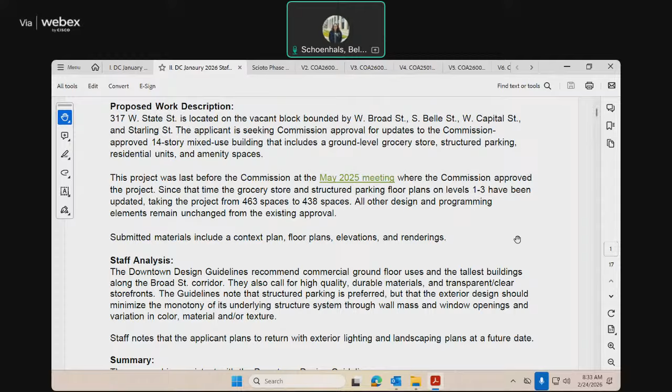All other design and programming elements remain unchanged from the existing approval, and submitted materials include a context plan, floor plans, elevations, and renderings. The downtown design guidelines recommend commercial ground floor uses and the tallest buildings along the Broad Street corridor. They also call for high-quality durable materials and transparent clear storefronts. The guidelines note that structured parking is preferred, but that the exterior design should minimize the monotony of its underlying structure system through wall mass and window openings and variation in color, material, and or texture.

Staff notes that the applicant plans to return with exterior lighting and landscaping plans at a future date, and the proposal is consistent. Just to quickly look at the drawings, like I said, they remain largely unchanged. It's just looking at those floor plans from levels 1 through 3. So this is level 1. You can see the grocery got a little bit smaller, and then the parking was expanded over. That's to accommodate also for changes on 2 and 3. But I'll let the applicant go through the package with you all.

Thank you. Very good. Good morning. Good morning. Could you introduce yourself for the record, please? Yes, Daniel Haynes with the Columbus Architectural Studio.

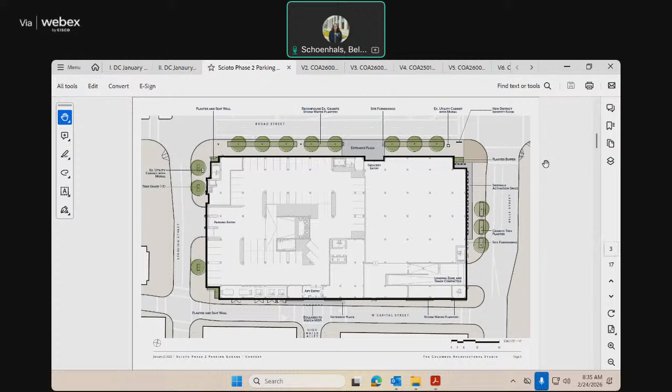Okay, what does it do to us on the outside of the building, I guess? Basically, there's one level of parking that's now gone from the elevation. Beyond that, there should be very little difference in appearance. The aesthetic should remain the same. So there was a middle level of that parking deck that's now disappeared. On the left there?

Yeah, it would go all the way through. We've actually improved the entrance sequence. The ramp used to be towards the corner of Capital and Starling, but we've moved that mid-block, and the city's traffic department was happy with that when we looked at it earlier. So we've improved that as well.

Any questions here for the applicant? Any comments? I have one.

So the original plan, because the grocery store had more frontage on Broad Street, there was more transparency, and now there's more screening and more garage over there. So I'm just wondering if you have any ideas or strategies for how to enliven that screening, whether creating an interesting pattern or making that something engaging for that streetscape on Broad Street.

When we came to this originally, one of our pieces was we had talked about art on the project. That's not part of this, but I think that's something we'd be looking forward to once we move into construction and figure out that last bucket of pieces. So we do think there's going to be some sort of art on the project, but it's not part of this initial piece.

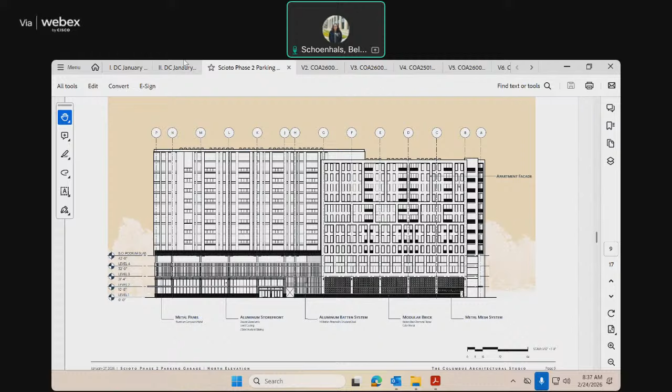All right, I wanted to note that Ms. Bartley is here, joining our quorum, and Mr. Pongonis has returned to the table.

This next case is for 410 South High Street, located at the block bounded by East Mound Street to the north, South High Street to the west, East Fulton Street to the south, and the Franklin County Parking Garage to the east.

This site currently holds the former Dorrian Commons Park, which opened in 1976, and a municipal building built in 1955. The applicant is seeking commission approval to demolish both the former park site and the James A. Karnes Municipal Building and construct a new 8-story City of Columbus Municipal Court building.

Included in the design is a pedestrian bridge over South High Street to connect the court building directly to city attorney offices within the 375 South High Street building. The applicant will salvage historical items on the site and will replace the mature trees on the site. Proposed materials include aluminum curtain walls, metal panels, and precast concrete panels.

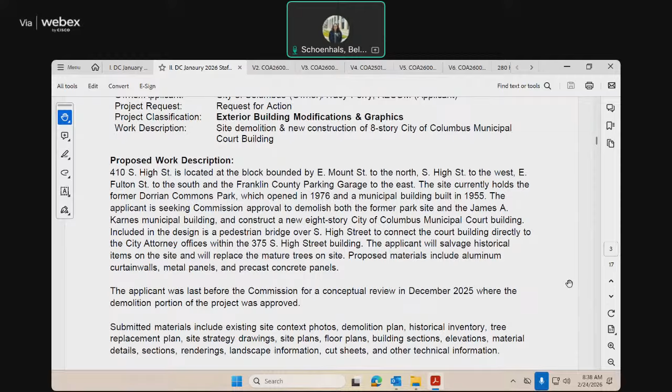The applicant was last before the commission for a conceptual review in December 2025, where the demolition portion of the project was approved. Submitted materials include existing context photos, demolition plan, historical inventory, tree replacement plan, site strategy drawings, site plans, floor plans, building sections, elevations, material details, sections, renderings, landscape information, cut sheets, and other technical information.

I'll have the applicant go over the packet with you guys, but I think the key here will be looking at that pedestrian bridge. That was the main focus of comments, and looking at the design changes within that. I'll have the applicant go over that.

Okay, just review very quickly. What are we actually asking for today? So the request is demolition today. That portion is already approved. So now we're approving the new construction and site work of the new building. Okay, so that's what they're seeking approval for today.

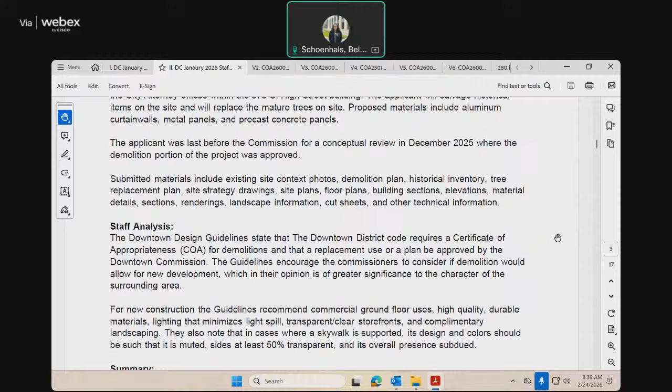Very good. Good morning. I'm going to go forward with my staff analysis. Please do, for the record.

The downtown design guidelines state that the downtown district code requires a certificate of appropriateness for demolitions and that a replacement use or plan be approved by the downtown commission. The guidelines encourage commissioners to consider if demolition would allow for new development which, in their opinion, is of greater significance to the character of the surrounding area. For new construction, the guidelines recommend commercial ground floor uses, high-quality durable materials, lighting that minimizes light spill, transparent clear storefronts, and complementary landscaping.

They also note that in cases where a skywalk is supported, its design and color should be such that it is muted, sides at least 50% transparent, and its overall presence subdued. The application is generally consistent with the downtown design guidelines, and staff notes that the Department of Public Service maintains authority over access to the right-of-way, just for that skywalk as it will cross over the right-of-way.

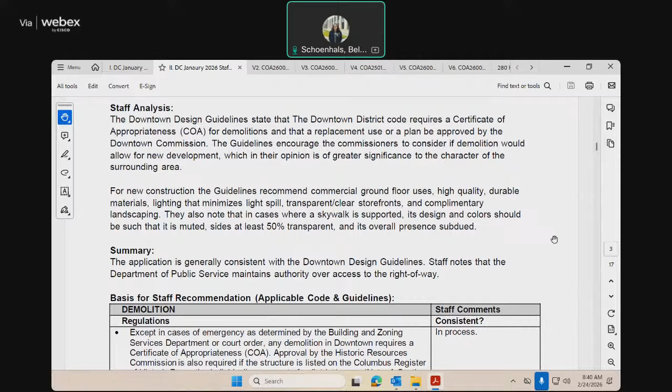Thank you. Very good. Thank you. Could you identify yourselves for the record, please? Yeah, feel free to pull that up. Is that better? Repeat it there. Great. Mark Parrish, architect with AECOM.

Chris Laster, landscape architect with Edge.

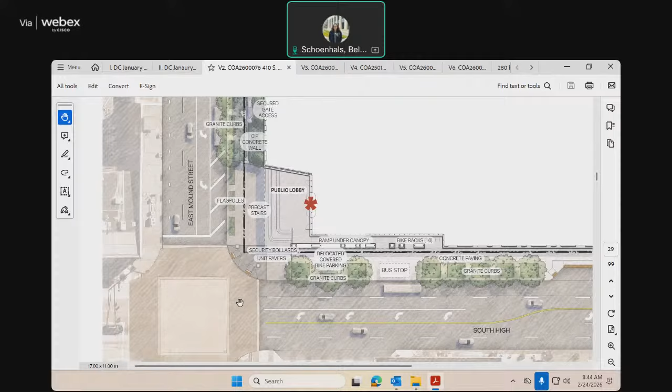Show us where that is, if you would. If you go to the next couple images it might help. That would be the north end of the site, on the left edge of that planter adjacent to the building, the north end of the building. Maybe one more, and then there's a couple vignettes in the next couple images that might help clarify that. Yeah, there you go.

In this area, though the shadows are kind of misleading, this is in full shade. We're treating that whole wall right there. There's an existing electrical vault right next to it, so we know we have to be very sensitive—we're not replacing or removing that. We're going to keep the cast in place wall away from it, set back maybe two feet. But yes, rubbed finish, and the planting in there will respond to the full shade conditions that are there.

You maybe go back one image from there. Yep, the northeast half of that right of way is an egress condition from the lower level of the building, so there's what amounts to a well there. What we've done is extended that cast wall to get pedestrian consistency at the right of way, and then where we can, picked up that planter bed that Chris just referenced on the west half of the site. We do have a secure gate to keep that secure for the facility going down to that lower level.

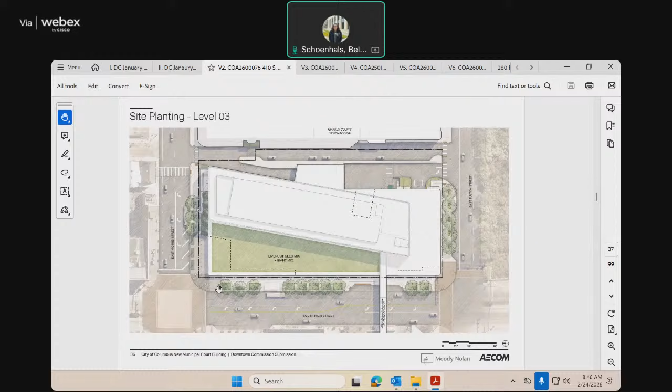I have asked this before, but to make the main entrance accessible, if I cross the street, do I have to go all the way down to the bus stop to find a ramp? Is that correct? Good question. If you could go back to maybe one more image.

That's perfect, good question. So the ramp starts about 60 feet south of the intersection there. Part of that is just the reality of the grades of the site. The site actually falls away to the east, so you really don't make up any vertical elevation by placing the ramp to the east or north end of the site.

So what we did was place the ramp in the condition where it could essentially get you to that upper level as quickly as possible. Since we saw this in concept, and even through the last review, working with DOT and working with the utilities out there, the grade differential between the sidewalk and that level has shrunk dramatically, almost a foot. So that ramp length has shrunk along with it, and the leading edge of the ramp has slowly migrated north to help close that distance.

When you're walking on that street and looking for the ramp, is there anything in terms of a landscape clue or an architectural clue that would help somebody understand this is how I would enter the ramp, this is where the ramp occurs on that street?

Yeah, good question. The four bays where you see the colonnade, where it says both bike ramps and ramp under canopy, where those building piers that support the canopy come down, the ramp is the first and only place on the project where it actually opens up. So all of that lands on a consistent base as you move south along that high street elevation. At the point where the ramp starts, we've opened it up effectively three bays early to give a visual and spatial cue that there's an opportunity to start to move into the glazed entry volume beyond.

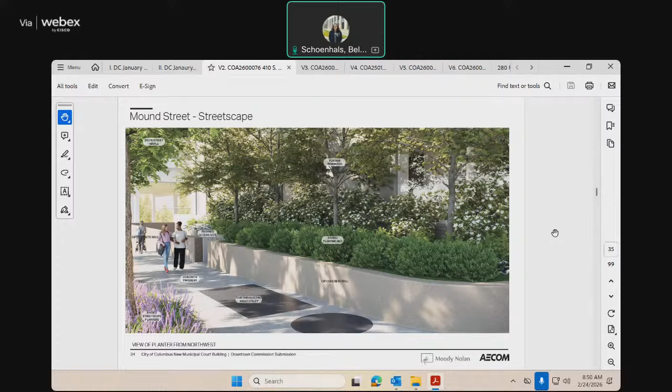At some point I want to look at... sorry to interrupt, Steve, could you just talk a little bit about the concrete wall? I recognize there are a handful of concrete walls, what is it, northwest, on the northwest corner here. But this is a lot of concrete wall without a lot of articulation, and it looks like it's getting a little tall. I kind of feel like that's a condition we're trying to get away from in the old buildings.

I can imagine all the reasons why it's concrete, and all the reasons why it's the height it is. Is there anything we can do to mitigate the appearance or height of that stuff?

Have you guys thought about it and this is what it is? Yeah, I mean, we have the ability to bring it down if we'd like, at least this wall, the one in the back. Probably not, because we will need at least a 42-inch high secured gate, if not higher, depending.

When you say the one in the back, what do you mean? You need a guardrail condition back there because the ramp slopes down, and eventually it becomes a fall condition, so it has to maintain a specific height.

Thinking too about this wall, we've tried to maintain a height that's not easily accessible, trying to prevent the public from getting up into that vegetative garden, walking, and then falling into the well. So we want to keep a certain height for that condition.

Excuse me, where is this wall? What stretch of roadway? Can I stand up? Yeah, if you go back to that vignette, I can show you.

Go maybe three down. Okay, yeah, that would be a good one. Go one more. This one. So this is that wall that we're talking about right here. This is the second wall.

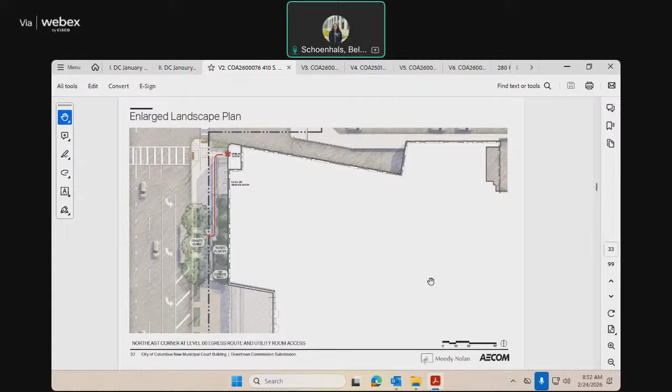But if we were to lower it, we would want to implement some sort of guardrail right here so that the public doesn't jump there.

Yeah, I totally get the guardrail condition and the fall height condition and the security of the building. I just want to be thoughtful about more expanse of plain concrete wall in this district, especially when the building is so nice.

Yeah, one of the other challenges too is this is our primary, essentially crash barrier for the security of the facility as well. So there are considerations that go into the height of that, which is, as you know, always a challenge.

And then there is this balance too, in terms of that height, where across the street the scale of those walls are purposely, I think, in many instances designed to be benches and occupied by the public. And part of that is there's quite a bit more distance to the building face, so again, a security conversation.

One of the challenges here is trying to create a kind of human scaled and tiered and layered section to that right of way, while also not necessarily promoting a ton of loitering because it's right at the building edge and there are security concerns that go with it. So you don't want people to sit on it, is where you're going. It's one of those balancing acts, you know. It's honestly an urban design challenge.

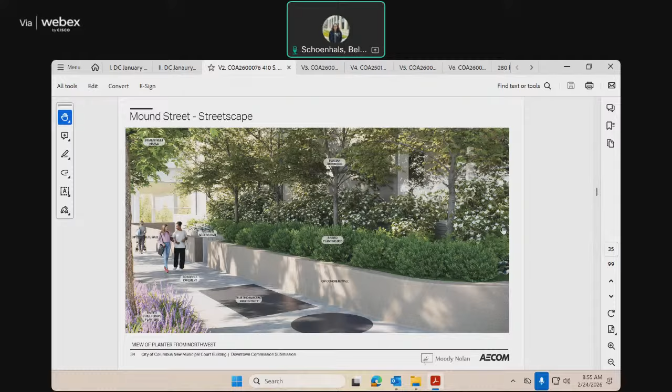We could do that. I think the concern there would be the more visibly porous that east half is, the more invitation it's potentially giving people to actually try to get down into that well. So again, it's kind of a balance between wanting to consider the pedestrian and define an edge there, while also not drawing a ton of attention to it.

I think with the grade change there, and the fact that you're probably walking down to go to the parking garage or something, it doesn't bother me, as long as it's not too high up near the entrance. That's where I am on it. I think it's okay too.

We maintain a datum, so it's the same height the whole time. So as you go up, it's disappearing. It never goes away, but it goes away at the entry.

And the last point on the material - when we were here last, we did have it precast to match the base of the building itself, more of an extension of the plinth that the building sits on. We did adjust that, in large part, to provide more continuity with the adjacent parcels across the street, and to promote more visual consistency with the three courts projects at Judicial Square.

Okay, are we ready to move on to talk about the elevations then, and particularly the crosswalk bridge? Everybody set on that? I don't want to push anybody along, we can always come back as well. Why don't we talk about this a little bit then?

So the bridge - if you remember, last time we were here we had a glass bridge with a heavy metal fin articulation. I think there was some appreciation for the color and texture that was providing, but there was some real concern about the visual weight of that, and just the reality that we weren't able to see through it, and it maybe didn't feel as contiguous with the building itself as it could be.

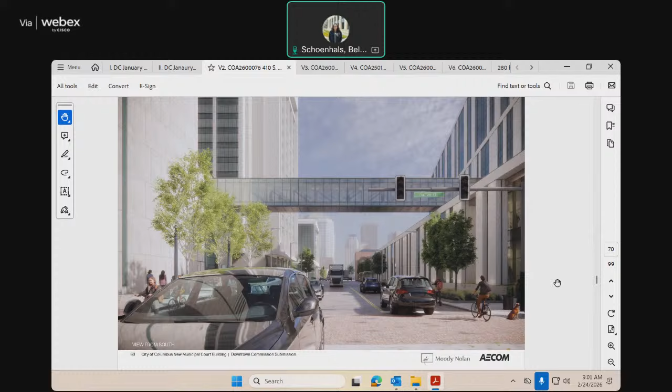We kind of discourage these overhead walkways, so I'm acknowledging that this one was necessary and we want it, but it seems to me this design kind of goes away—and I mean that in a good way. It's not drawing attention to itself. I think, if anything, it's creating a room surrounded by these new buildings and the old buildings.

And I think keeping it simple and elegant is the right direction. That's where I am on that too. I think you don't necessarily want it to be a design element, but I do think it should be very well done and very elegant, and I think you've gotten that here. I like this much better than what was there before.

Is this on a diagonal, by the way, or is it perpendicular to the street? It's perpendicular to the street.

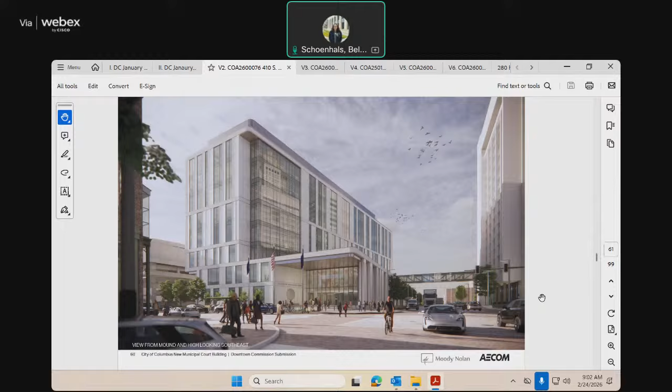The tower itself, if you remember, is rotated 10 degrees, so you do get a juxtaposition there. But the podium—those first two floors off of High Street—hold the street edge there. So the podium and the bridge itself are fully rectilinear, at 90 degrees.

So we have a proposal here to approve what we have seen, the design. We've talked through some of the site issues, particularly the entry and the streetscapes, and we've talked through the bridge. So I'm gonna try to move us toward getting a motion to approve this. I'm happy to, before we do that, see if there are any other questions or comments.

Anybody? And if there's anything from the audience—I see a few architects out there, so this is your chance. What's everybody's thought on this?

Have we already approved the demolition? Yes, we did. How did you guys arrive at your street tree selection? We worked with the urban forester and they selected the street trees. Are those consistent with what's around the corners there, west and north? Not necessarily, but we were trying to initially match that.

And then we went in for our public tree plan, and the only comments they had were about the tree selections that are up there. What selections are those? Along Mound, we have the State Street maples. On High, we have Musashino Zelkovas, and Fulton is done by the ODOT project—those are frontier elms.

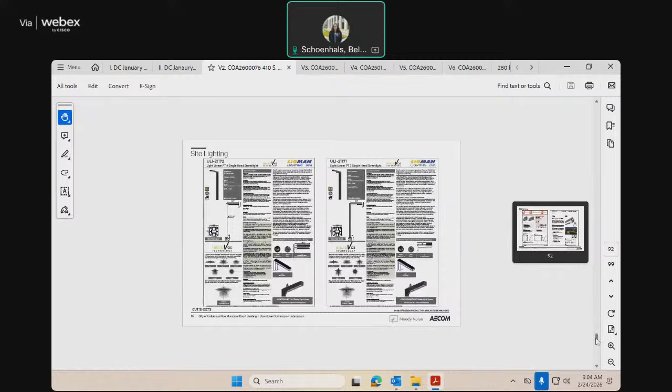Is that right? Yeah, yeah. So replaced by the elms. That's not a picture of a plane tree.

Picture of honey locust. Yeah, that one just stayed in there. That needs to come out.

It is the State Street tree, the Musashino Zelkova, as well as the frontier elm. Is that a standard variety of the Zelkova? Because those can get kind of very broad. This one is a lot smaller, a slightly different spread, maybe fifty, a slightly different variety, and is it more upright then? Oh, that would be good, especially for the buses and stuff. And then the ironwood is within our property, not the right of way.

In the bed, that doesn't seem the right size there. Okay, other questions, comments?

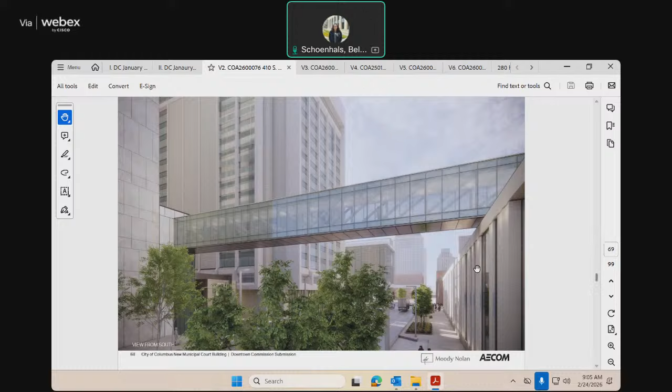The green roof that you have, how are you using that? Is that accessible to the tenants? Is that just there for sustainability? Good question. So we are still trying to make it accessible. Part of that's a budget challenge, part of that's a security challenge. The roof itself, I mean, you could say it's sustainability, that's really what we're implementing on the project.

It is our primary source for treating the water coming off the building and being discharged, because we have effectively no footprint on our site outside of the building footprint itself. That's the means for us to treat the rainwater before we discharge it. Did I get that right? Yeah, it's an Ohio EPA requirement for water quality on the project.

We have to. But it won't be on the top of the building, right? So it's about 17,000 square feet, all on that lower podium level. So all of the buildings around it will be able to broadly see it, but not the highest tower across the street. And we've essentially made it everything north of the bridge itself right now, trying to squeeze a little terrace in there and make that occupiable.

But as of right now, it is not. We're also working with some vendors around town to try to get as much scale within that planting as possible. So that is not part of their request here today for this package.

Okay, where are we here? Signage, are you using that? We'll come back for that. Lighting, do we have lighting in? We'll come back for that as well. Okay, lighting and signage, we'll come back to those.

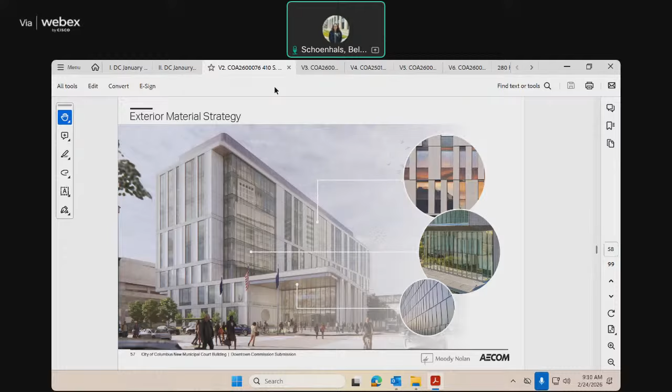Thank you. Thank you. Great, we very much appreciate your time. Nice building. Thank you for your tweaks along the way too here.

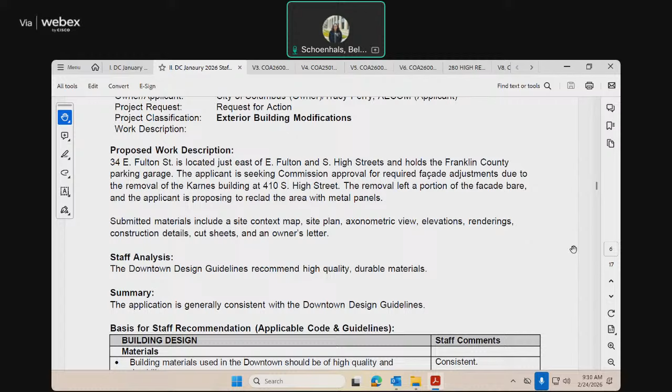This next case is for 34 East Fulton Street, essentially next door to the previous site. It's located just east of East Fulton Street and South High Street, and holds the Franklin County parking garage. The applicant is seeking commission approval for required facade adjustments due to the removal of the Karnes Building at 410 South High Street. The removal left a portion of the facade bare, and the applicant is proposing to reclad the area with metal panels. Submitted materials include a site context map, site plan, axonometric view, elevations, renderings, construction details, cut sheets, and an owner's letter. The downtown design guidelines recommend high-quality durable materials, and the application is generally consistent with those guidelines.

And I'll let the applicant move through their package. Thank you. Very good. Good morning. Could you introduce yourselves for the record, please? Yes, Lou Pellet, Moody Nolan, project architect. Tony Kosick, Moody Nolan, project architect.

Could you raise your right hands? Do you swear and affirm that the testimony you're about to give is the truth, the whole truth, and nothing but the truth? If so, say I do. I do. Thank you very much. Okay, walk us through.

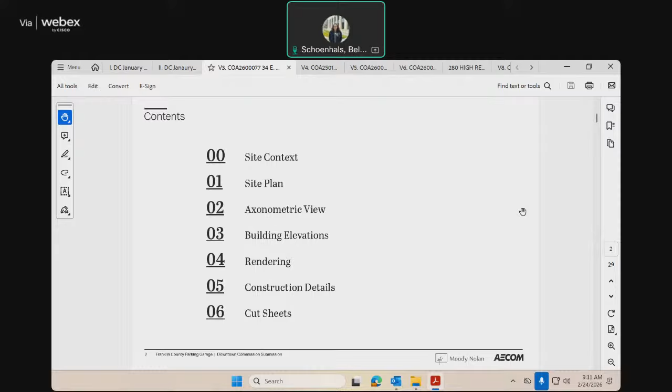The group has already approved the demolition of the Karnes Building. Part of that demolition included a large connector to the existing Franklin County parking garage, and that element was actually quite large - a 4-story connector. Happily, the connector had minimal connections into the parking garage. This was an elevated connector, basically a square attached to the middle of the parking garage. Those connections were only through the balconies into the parking garage, so we've got a big void at the side of the garage. If you're in the parking garage, what you see now is a CMU wall, so there are no actual penetrations at those locations.

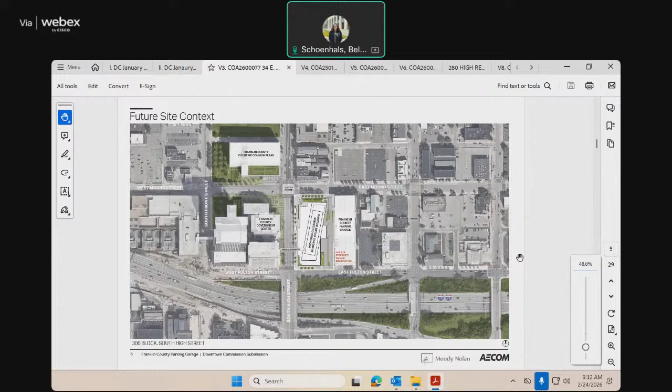Once we remove that connector, we will have a big box of exposed concrete on this large brutalist parking garage. What we're proposing now is to infill that void with materials complementary to our new building and also accent what's on the existing garage. I think the colors and materials will be complementary to what's occurring on the garage. Additionally, our new building will pretty much block the view of this existing parking garage, so we feel like what we've done is complementary. I'm not trying to downplay what's going on in the parking garage, but this will be pretty much in shadow of our new building.

We brought Tony to help describe what we've done with this infill, so I'll let Tony describe that. Okay, so just so we understand, what you've got here on the right, that's the subject of this application. The rest of the building, you're not touching, is that correct? Correct. Thank you, just for clarification.

Certainly. As Lou's saying, you can see with the paneling here, that's where the existing connector was, basically infilling. The two elements were structurally independent - they have their own separate structures, so taking it apart doesn't affect the garage at all. The glass box, if you will, is where the original connector was, how you got to and from the garage to the original Karnes building, which we're replacing in kind with curtain wall, basically leaving those elements there all the way up as they die into the panels. The panels are a tapered series metal panel, complementary to the rest of the garage, trying to add pop so it's not just bare concrete, but also adding some shadow and depth. You might see it slightly when you're coming in and exiting from the parking garage. Okay, and those are metal panels? Yes.

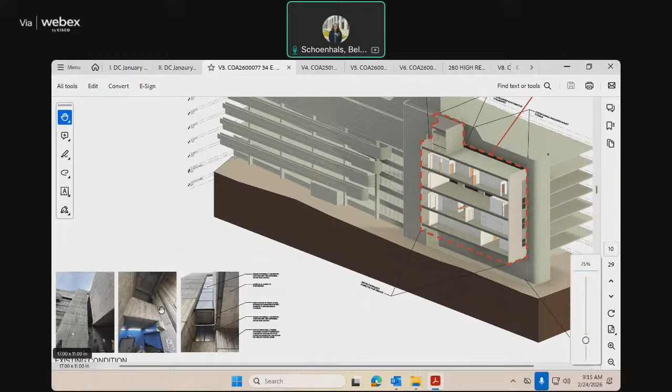So what is it - is it a metal wall on the inside too, metal panels? On the other side of the panel, inside the garage, it's just the existing concrete wall. That really doesn't change? No, correct, we're just covering it up so it's not bare concrete on the outside. On the inside it's remaining the same; on the outside we're covering it up so it's not exposed.

I have a question about the color of the panels. In your packet it looked like a color palette of grays, but it really has more of a warm tone. I'm wondering, because on the previous building the sample panels we looked at had some warmth to them - are you matching that? I'm not quite sure what the gray looks like. You didn't bring a sample with you, did you? No, we were planning on matching what we showed on the other building, so it would be the same color panel.

On the existing garage we have bronze glazed windows, so we're trying to play both sides - the existing garage and our new building - hitting a medium range between the two: introducing our panels on the building but also respecting the dark bronze and brown glazing on the existing garage.

So this is light, but it's a bronze tone rather than gray? Correct, that makes sense. The sample colors you're using are the gray ones in the packet? They're primarily the gray. And as mentioned, we're trying to introduce some shading and shadowing, which is why we've varied the panel dimensions - trying to mask as much as possible that it's not a direct match.

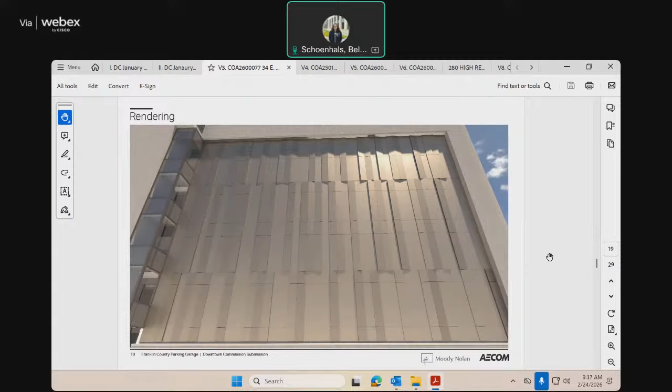What's the pleasure of the group? Move to approve. Is there a second? Second. Okay, there's a motion on the floor. Any questions, comments? Hearing none, all those in favor say aye. Aye. Those opposed? Motion carries. Great, thank you.

All right, so this next case is for 181 East Broad Street, located at the southeast corner of East Broad Street and South Fourth Street. The site contains a structure built in 1856, along with a surface parking lot, and is home to the Columbus Club. The applicant is seeking commission approval to add new parking lot hardscape, new segments of brick masonry wall with intermittent new fence sections along the east...

Oh yep, we're recusing ourselves. Okay, let me just let the sounds die down. I just wanted to note that Mr. Loversidge and Mr. Whitman are recusing themselves from the case. Jana, you're good with taking over to chair?

Okay, so this site contains a structure built in 1856 along with a surface parking lot and is home to the Columbus Club. The applicant is seeking commission approval to add new parking lot hardscape, new segments of a brick masonry wall with intermittent new fence sections along the east frontage, new gates in existing fence locations along the west and north frontages, new automatic vehicle gates at the southern parking lot entrances, modifications to the sidewalk paving along the northern Broad Street frontage, and new landscape plantings.

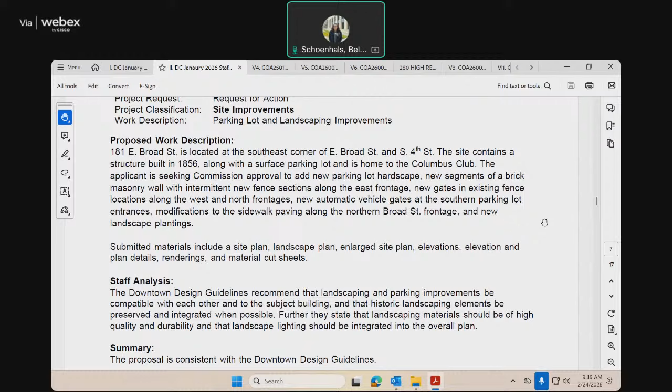Submitted materials include a site plan, landscape plan, enlarged site plan, elevations, elevation plan details, renderings, and material cut sheets. I'll let the applicant mostly go through their application, but again, it's mostly just along the borders of the site and then interior hardscape there.

The downtown design guidelines recommend that landscaping and parking improvements be compatible with each other and to the subject building, and that historic landscaping elements be preserved and integrated where possible. Further, they state that landscaping materials should be of high quality and durability, and that landscape lighting should be integrated into the overall plan, and this proposal is consistent with those guidelines.

Thank you. Okay, well, good morning. First, we'll swear you in. So raise your right hand. Do you swear and affirm the testimony you are about to give today is the truth, the whole truth, and nothing but the truth? So say you do. I do.

And if you could give your name and association for the record. Chris Meyers, Meyers and Associates Architects. Nick Munoz, Meyers and Associates Architects. Then you can walk us through the project.

Thank you for having us. The project really started as an evolution of some construction that had been happening to the east of the property. There was some damage and deterioration along the east edge of the property at the existing parking, some existing hedge row and plantings. There is currently a fence. And through that damage, it prompted the club to want to elevate the perimeter enclosure of the property to match some of the existing brick wall and fence enclosures that are around other portions of the site.

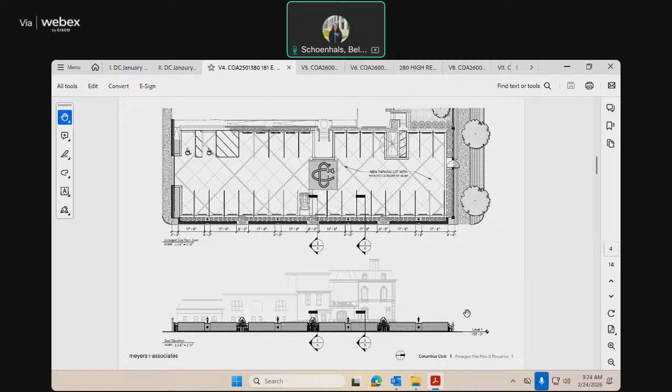Well, it looks very thoughtfully designed. Thank you. Yeah, I like how you broke up the wall with the fencing, where the trees drop in, where the hornbeams come in, and the wall's 6 foot tall. It's like 5'6", I think, with a cap detail. Again, it just matches the rest. Yeah, 5'6" with the stone cap.

That aligns with the existing walls on site. The metal work is new because of the new improvements, but it replicates the historic wrought iron railing. There's a craftsman that the club uses out of Lexington, Kentucky who's coming up to do this work.

Those details will be really beautiful. Great detail. Okay, well, does anybody have anything else? Okay, so does anybody like to give a motion for approval?

Could I clarify one thing? I think we might have originally submitted as a conceptual review, and I think it's now being considered as the final review, which is what the document says. We're happy to have it considered as the final review. We didn't want to leapfrog the process. Given the additional drawings that I requested that you all were able to provide, this went from conceptual to a complete application.

So we're voting for commission approval today. And I forgot to ask, is there anyone in the audience that has a question or comment on this project?

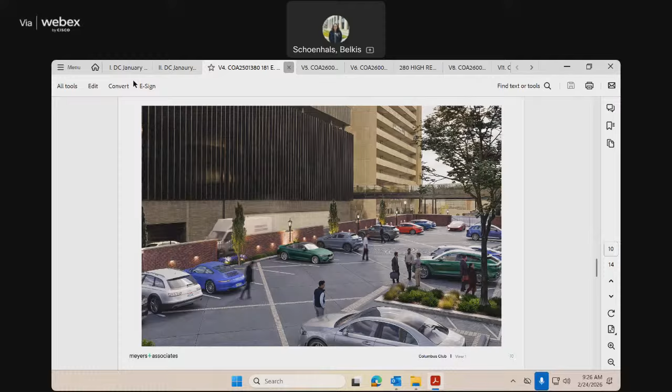I guess we should tell them. Oh yeah, that's great. We're just going to wait for other commissioners to return, two members to return.

And this is for 344 West Town Street. So if those applicants are here, they can go ahead and come up to the table and take a seat. Thank you.

This next application is for 344 West Town Street, a vacant lot located at the northwest corner of West Town Street and Bell Street. The applicant is seeking commission approval to construct 8 new pickleball courts with fencing and surrounding synthetic turf. The remainder of the site will be seeded with grass lawn. Submitted materials include a utility plan, site plan, and material cut sheets.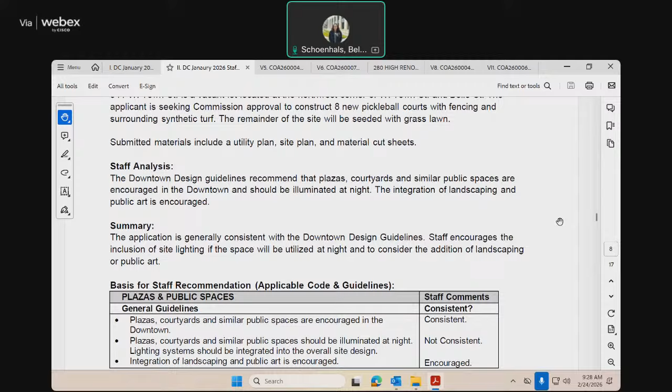Okay, very good. Would you introduce yourselves for the record please? I'm Robert Ferguson with EMH&T. And I'm Nick Stefanik with Downtown Columbus, Inc. Could you raise your right hands? Do you swear and affirm that the testimony you're about to give is the truth, the whole truth, and nothing but the truth? I do. Thank you very much.

The project entails the installation of 8 pickleball courts and surrounding ancillary improvements, including sidewalk that leads over to Belle Street as well as Chapel Street. Belle Street's to the east and Chapel Street to the north. The courts will be surrounded by chain link fence, vinyl coated black, with gates so that it can be secured at night when it's not in use.

Nick's going to talk a little bit about the operation and hours. Sure, this is certainly intended to be a daytime amenity for the residents around the area. We heard through the downtown strategic planning process that more residential amenities like this would be a real asset to downtown Columbus, and we agree. This is currently a gravel parking lot that is slated for future development, so this is intended to be a temporary installation, expecting around 3 years. With that being said, this is intended for daytime use.

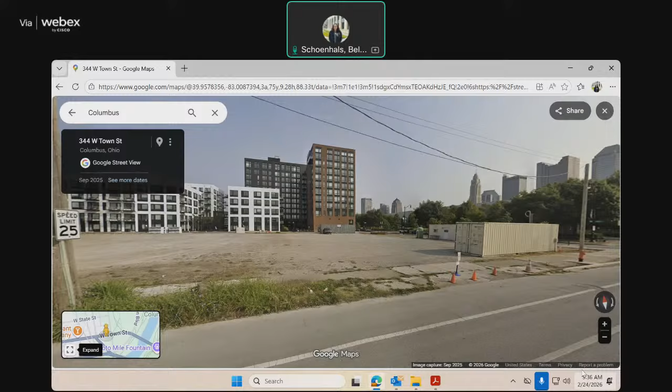I think shifting this creates an experience for 3 years, and I don't think it costs any more money to shift it than it does now. It creates an amenity you can be proud of—it looks good, feels right, and is complimentary to the park and to the residents. Yeah, I think we can slide that down, increase the space in the north end, and accommodate that request.

Is there any additional grading you would need to do in order to shift it? No, we would just have to modify the grading scheme slightly to accommodate that, but it wouldn't drastically alter the design as it sits today.

So we heard a couple comments about benches or shaded areas for spectators—are you planning that at all? I don't see it in this drawing. It would be movable furniture, umbrellas, things of that nature. How would that work—do you put them in and take them out? Yeah, it would be seasonal, installed seasonally. So they wouldn't be out there in the winter, but they would be out there during the summer.

What's the pleasure of the group here? Any comments from the audience? What's the pleasure of the group here on this? Do you want to make a motion with some thoughts attached to it?

Motion to approve shifting the courts to the south, where it straddles Belle and Town, with that 20-foot offset you mentioned before—that was your guiding light—allowing the north side to open up to be more of a pedestrian experience for furnishings of that nature.

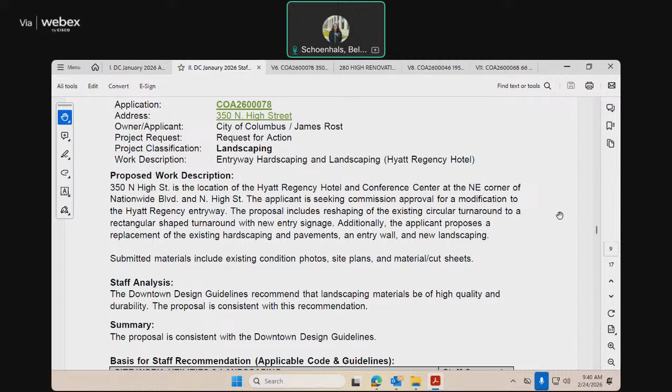350 North High Street is the location of the Hyatt Regency Hotel and Conference Center at the northeast corner of Nationwide Boulevard and North High Street. The applicant is seeking commission approval for a modification to the Hyatt Regency entryway. The proposal includes reshaping the existing circular turnaround to a rectangular shaped turnaround with new entry signage, and additionally the applicant proposes replacement of the existing hardscaping and pavements, an entry wall, and new landscaping. Submitted materials include existing condition photos, site plans, and material cut sheets.

This is the existing condition with that circular turnaround. And then if you look at the site plan, you can see it becomes more rectangular in nature. I'll let the applicant go through this in detail.

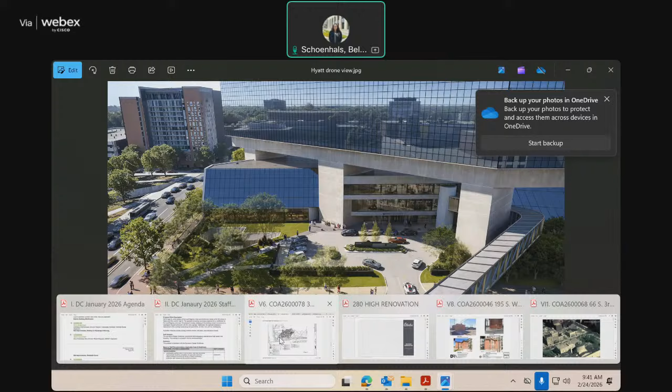We received some additional rendering photos that were not included in the writing of the staff report, but I wanted to give the applicant the courtesy of having those images pulled up here so we can see some of these renderings. Downtown design guidelines recommend that landscaping materials be of high quality and durability, and the proposal is consistent with the downtown design guidelines. Thank you.

Very good. Do you happen to have a picture of the existing condition over there? Yeah, I can pull it up. Why don't we take a peek at that while we pull this up.

All right, so we are in it here. This is that turnaround. So they're really just wanting to square this off, make it a softer treatment. I'll let the applicant speak to this, but the site work area is in this area and then connecting over onto High Street. But this is what we're working with currently.

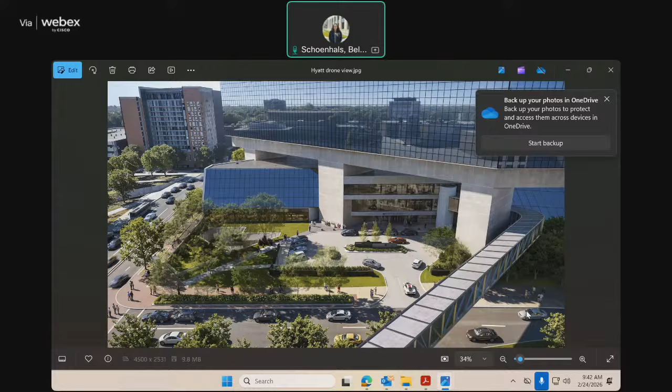You could even see when you asked to see the existing condition, that demonstrated sort of what we've got to fix here. That's what we have. We're really adding more capacity, a better situation for our guests in staging cars and having the valet function operate better, and have it look better. I think we can do that. It's an important corner at Nationwide and High, and we're just trying to make an improvement here.

Jeff can probably walk you through it. It is tired now, for sure. There's something to be said for just freshening things up. Yeah, we do it on our buildings, you have to do it. Sure, and I think you get something out of it, and it helps the environment, the community too as well. Do you want to walk us through it?

Yeah, Jeff, as Brian said, what you're doing is pretty simple improvements. We're really not adding that much more pavement, given the way the site lays out now, but we do add a little bit of pavement to square the auto court off. We've got a granite wall and some landscape along Nationwide that will help screen it a little bit. We're increasing that landscape island in terms of size, and that will have a sign component in the future, which when we have a need for graphics, we'll come back to you. Kind of a monument sign, low on the wall, nothing too tall, some landscape to go along with it.

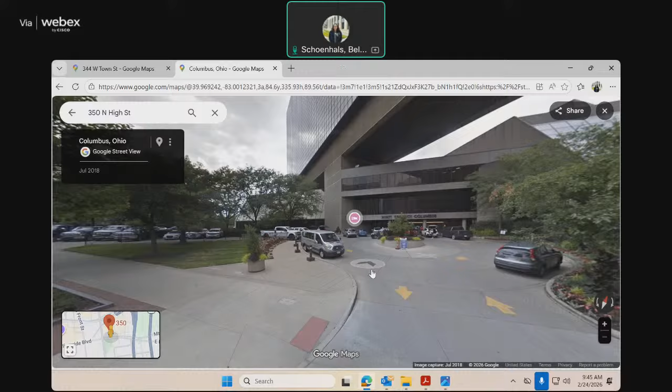We can handle that when it comes about. Any change in lighting or anything there? Not really, there's a couple leftovers from a lighting perspective, but generally just some uplights on the trees in the landscape island.

Tell us what you are doing as it relates to planting. There are 3 trees in there—those are ginkgo, which will have nice fall color, a nice high canopy as they grow in, and an upright form. We've also got some ground cover, pachysandra, and some spirea. Otherwise just some basic stuff like a taxus hedge along the granite wall.

Basic stuff, great. Questions, comments? Two quick questions—the low walls you're creating, that's clad in what material? Granite. And what color is that? Black. Nice and simple, not trying to make too much out of it.

And that's for the walls labeled A, B, and C, right? That's right. That particular granite is the same one used along 10 West Nationwide on the Front Street side. That wall material looks really good, that's right, along Front.

For the wall labeled A, is the landscape sitting behind that wall? Behind it, yeah. So I think it said those little trees are about 3 feet high, or maybe 3.5. Yep, that's right. So that will be a little bit higher than the wall? Generally, yeah—there's a bit of grade change to deal with, so we're trying to handle the appearance from the front with the grade change, and the appearance from the inside. Right, but it looks like from your rendering that when looking into the courtyard, you'll see the landscape above it to some extent. That's right.

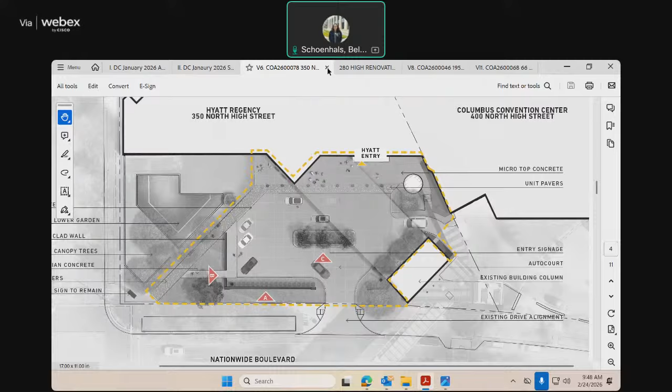This next application is for 280 North High Street, located at the northeast corner of North High and East Chestnut Streets, the site of an 18-story office building. The applicant is seeking commission approval for exterior building modifications, landscaping, and graphics to retrofit the building to a mix of office and residential uses. Levels 1, 2, and 12 through 14 will remain office, and the rest will be residential, including 1 to 2 bedroom apartments. The work includes adding exterior aluminum and glass balconies, new windows, new fencing, and a lower amenity courtyard. New graphics include an illuminated monument sign, a non-illuminated canopy sign, a non-illuminated wall sign, and 2 vinyl window signs. Looking at their package, I'll quickly go through it.

This is the building in question, located on North High Street. We have the building and then what will be a lower courtyard. This is the existing condition of the site, and this is the proposed site plan.

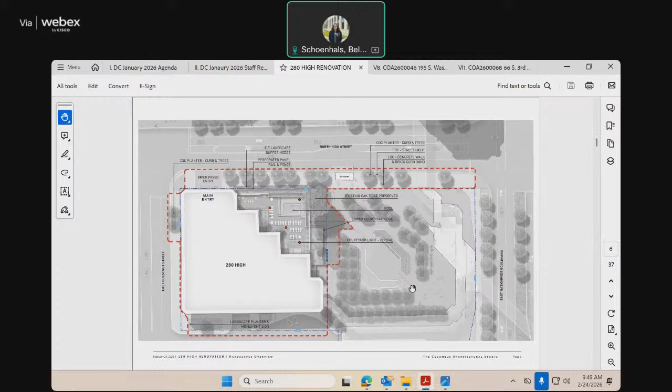Materials, some information about the proposed fencing, plantings, and then moving along we have floor plans, elevations, and materials. I'll let the applicant go through those, but I also wanted to mention some imagery was provided to me which was not included in the writing of the staff report, but I did want to display them on the screen as a courtesy.

So we have a few renderings here, and the applicant can talk through those.

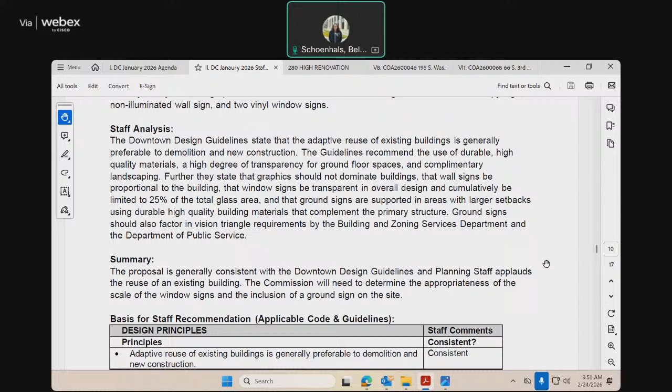In summary, the downtown design guidelines state that adaptive reuse of existing buildings is generally preferable to demolition and new construction. The guidelines recommend durable, high-quality materials, a high degree of transparency for ground floor spaces, and complementary landscaping. Further, graphics should not dominate buildings, wall signs should be proportional to the building, window signs should be transparent in overall design and cumulatively limited to 25% of the total glass area, and ground signs are supported in areas with larger setbacks using durable, high-quality materials that complement the primary structure. Ground signs should also factor in vision triangle requirements by the Building and Zoning Services Department and the Department of Public Service. The proposal is generally consistent with the downtown design guidelines, and planning staff applauds the reuse of an existing building. The commission will need to determine the appropriateness of the scale of the window signs and the inclusion of a ground sign on the site.

Thank you. Very good. Now, do I need to, do you want me to swear these folks in again?

They've already all been sworn in. Could you identify yourselves for this case? Dan Haynes, Columbus Architectural Studio. Ryan Ellis, Nationwide Realty Investors. Jeffrey Pongonis, MKSK. Thank you, and they have all been sworn in. Does that work for you, or do you want us to go through? No, they've all been sworn in, so that continues. I also wanted to note for the record that Mr. Pongonis has recused himself from this application and is serving as one of the applicants to present. Thank you, all right, very good.

Thank you. I'll kick it off and then turn it over to Jeff and Dan. As you know, this is a challenging project. It's capital intensive, but I think it gives another 45 years or longer life to this building because it's responsive to the market.

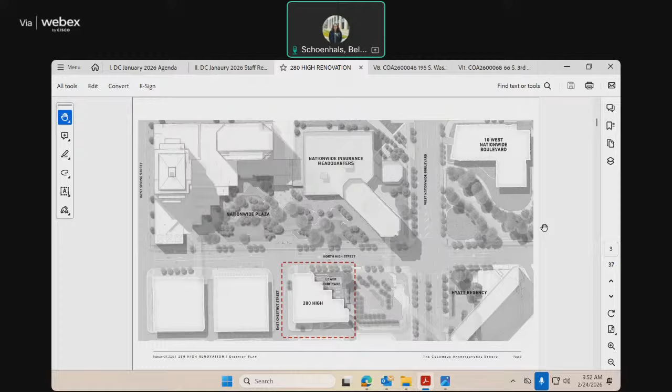We identified that this building, really designed in the late 70s and built in the very early 80s, had a floor plate that could be adapted to apartments, fairly consistent with how we've been developing. We've developed 2,000 apartments between the Arena District and Grandview Yard, so we know what the market wants to see. We felt like we could efficiently add 148 units to this building.

But the market's competitive and we can't leave anything out. We still need a strong amenity package. The questions we asked ourselves early on: how are we going to get outside space? We wouldn't build an apartment project in Columbus without balconies or patios, so that was challenge one. And then also, how can we add amenities? We also wouldn't build an apartment project without access to outside space, a pool area or something like that. In both cases we were able to figure that out—not inexpensive to do, but it makes sense for us, and Dan and Jeff will get into this, but we still have it feel appropriate in an urban area.

So we've got the balconies. We think they enhance and modernize the look of the building. We have a water area—I'll say a pool or a spa, a large spa or small pool. Still working on the details of that in some respects, but that's what we're going to have there.

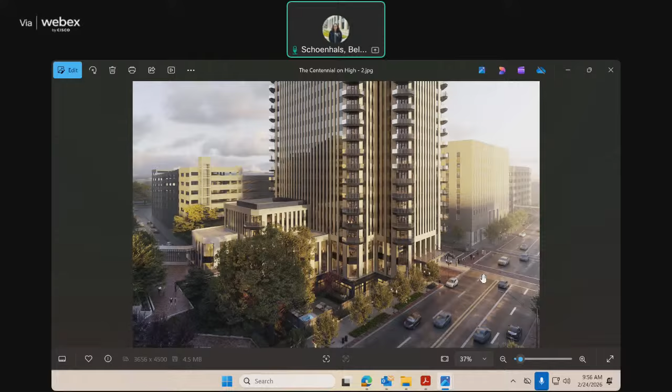Let me step back for a second. I mentioned this pool or spa area. We identified that the basement space extended beyond the footprint of the building, all the way out to High Street, which gave us an opportunity, and ultimately what's in our plan, to take the lid off the basement outside the footprint and expose a lower courtyard that's 15 feet below High Street grade. So now we have an opportunity to get that pool or spa amenity within the configuration of the project. It gave us the green light to build a project that's going to be attractive from a market standpoint.

So we're excited about it, and think we can get it all leased. As most of you know, Nationwide, who occupied the building for most of those 45 years, not all of it but most of it, has some surplus office space. The way we look at it, our apartments are leased and we want more of them, and we have plenty of good office space still available for anybody that wants to be part of the Arena District or the Nationwide area. So, good response, I think it's the appropriate response to the market, and it gives us a future for this building. With that, I'll turn it over to Dan and Jeff to get into the details.

I think it's for approval.

All right, good, so I'll set up the site a little bit and then pass it over to Dan, and if I miss a detail on the building, Dan, let me know. So just a couple basic site parameters here. The entry, you can see, is located at Chestnut and North High. That'll be a nice paved brick entry with a canopy over it. Not much of note on East Chestnut. Around back is just a little bit of landscape and circulation improvement there. There's also a small sign to help visitors understand access to leasing and access to the adjacent parking garage. Then back to the front of the project. Excuse me for a second.

From the architectural aspect, from the overall view—Belkis, I know we've got you jumping around—if we can look at the renderings real quick. If we step back and think of this whole area as the overall challenge: these buildings were built in 1980, and we wanted to respect what was happening in that campus, but still update it. The addition of these glass balconies really gives it an updated look, but still very respectful for what's in the area and the campus that's happening through there—sort of a glass facets to those pieces, I think is a nice add.

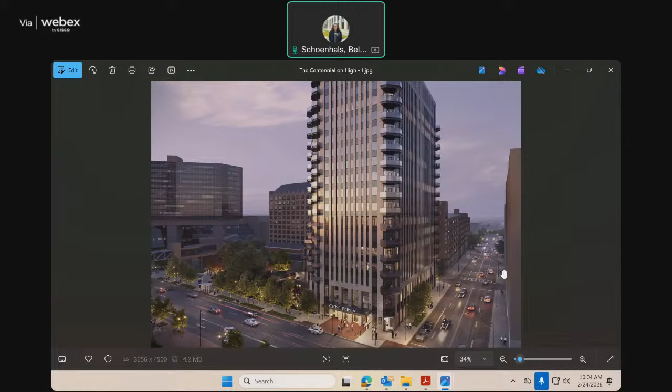That's going to be clear glass that we're adding, with a metal panel on the fascia of those balconies as well. We've also, as mentioned before, added more glazing up top where we're adding those penthouse units. You can kind of see up there that right now is just all precast—we've opened up some windows through there.

And then down below, as mentioned, below grade we're switching to a dark brick and dark cast stone details, which we think will really set off this lushly appointed planting that's happening down there. So here are those pieces—it'll have a look of the foundation being exposed.

We have a clubhouse down there and 5 units that walk out and have sort of a private zone happen in there. We went through a lot of expense and thought to preserve the existing oak on our property piece there. It's a wonderful tree and we're trying to keep that in existence. So that's the broad scope of what we're trying to do architecturally.

I think this is a good building for conversion because of the shape of it. So many of these buildings are square and deep, so you can't get good units because you can't get to the edge. The way this works out, the floor plan looks like it works really well, pretty efficient.

So the office floors are sort of in the middle of this. That sounds like a nightmare, adds to the challenge. But it also is responsive to where we had these existing tenants.

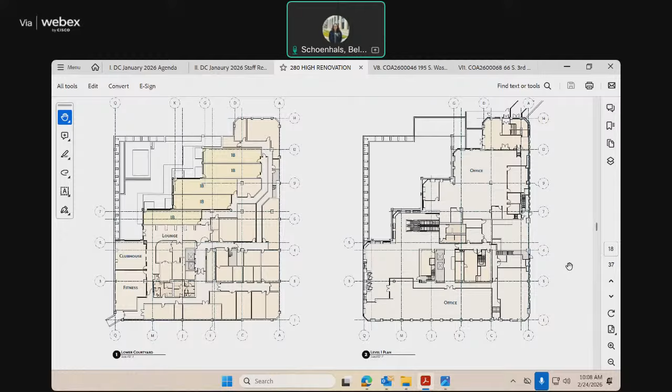My question is, can you go over the glazing, like in the packet? You mentioned that you're replacing windows and replacing spandrel glass - can you go over the extent of that and the color of that? Where those balconies are, where we're opening those pieces up, we're removing that curtain wall system and replacing them. For all of the stuff that we are replacing, we're putting like with like, so that we've got the same consistency of the glazing happening through there. There are larger sections along the way where we are keeping the existing glazing in place. We are going through and looking at ways of making sure that we've got the thermal protections that we need - we're doing insulation to the walls and stuff for that.

We're putting the clear glass down on the balconies themselves. Where we've opened up some areas that span multiple levels, that's where we'll have some of that spandrel material put back in place, sort of like with like, if that makes sense.

Is every window on the project being replaced, or matched to existing? Everything is being matched to what's existing there. Our color palettes are working off of that too, because we want to be respectful to our neighbors and part of that campus piece. So our metal colors are matching, and our glazing is matching as well.

What was the original glazing color, is that pretty much clear or heavily tinted? It's sort of a bronze color. Back in 1980, this is how they got thermal protection back in the day, they had to go darker, so we're going with that darker glazing. Will you feel there's enough transparency from inside an apartment? I don't think from the inside out you're going to notice it, it's not noticeable. We've experienced that in other condominium projects we did in the early aughts where those were dark glazing too. I don't think it's noticeable inside.

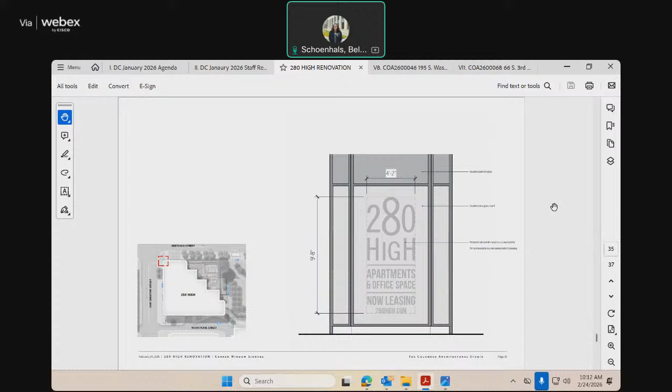So we're coming up on our 100th anniversary, and this is a nod towards that, almost a thank you from a community standpoint for all the support over 100 years. We wanted to incorporate that and go beyond 280 High. We'll have to come back and do signage, there's been some nods and references to certain signage pieces here, but we've got more work to do on that, and we're changing the name.

Anything on the lighting then that happens? I think we're not changing any of the lighting we have in this package here. We are adding some new lighting at balconies, and we've also added small lighting around the pedestrian areas. So we'd be approving what you have in the package, and the same thing for the lower courtyard as well.

Any other questions for anybody? I just had one quick question about the lower courtyard. I understand that's recessed from High Street. Within that, I see curbs around the landscaping, not curb cuts. Are those all at the same level or are there grade changes? It's a tiered terracing system. So we're approximately 15 feet below grade.

What we're using is we're trying to get as much landscaping and lushness down there as possible, so we're using terrace steps to get greenery to fall down on top of that. So what we're seeing here, the curbs, are terrace steps? Correct, those are the terrace steps.

Okay, other questions? What's the pleasure of the group then, folks? I move approval. There's a motion to approve, is there a second please? Okay, there's a second, the motion is on the floor. Any other questions, anything from the audience? Hearing none, all those in favor say aye. Aye. Those opposed? Motion carries.

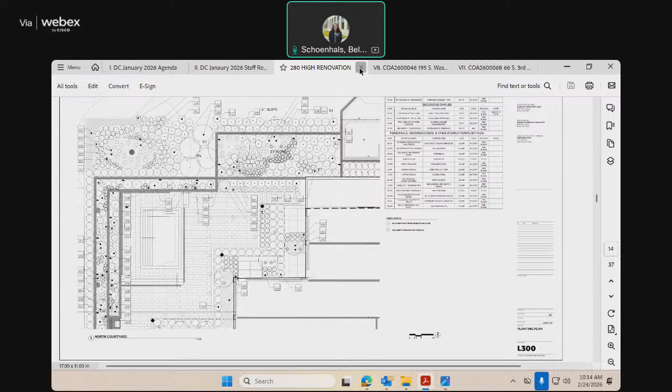I know, those are exciting, huh?

Keeping that. All right, so this next application is for 195 South Washington Avenue. This site is located at the southwest corner of South Washington Avenue and East Walnut Street, and holds a vacant residential structure built in 1900.

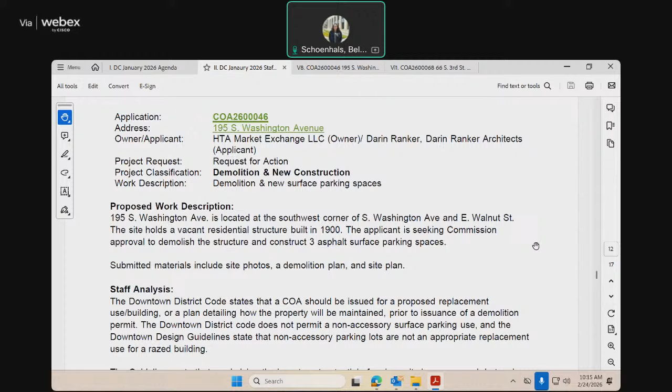The applicant is seeking commission approval to demolish the structure and construct 3 asphalt surface parking spaces. Submitted materials include site photos, a demolition plan, and a site plan. We have a few existing site condition photos here, and I also have the Google Street View pulled up, if we want to look at that. And then just a site plan of what's there currently, noting the existing structure here at the corner. This is the proposed site plan, noting the demolition of that structure and then the added parking spaces.

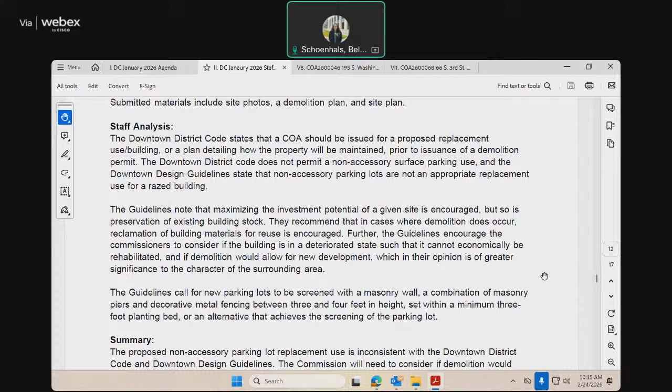After review, the Downtown District Code states that a COA should be issued for a proposed replacement use or building, or a plan detailing how the property will be maintained prior to issuance of a demolition permit. The Downtown District Code does not permit a non-accessory surface parking use, and the Downtown Design Guidelines state that non-accessory parking lots are not an appropriate replacement use for a razed building.

The guidelines note that maximizing the investment potential of a given site is encouraged, but so is preservation of existing building stock. They recommend that in cases where demolition does occur, reclamation of building materials for reuse is encouraged. Further, the guidelines encourage the commissioners to consider if the building is in a deteriorated state such that it cannot economically be rehabilitated, and if demolition would allow for new development which, in their opinion, is of greater significance to the character of the surrounding area.

The guidelines call for new parking lots to be screened with a masonry wall, a combination of masonry piers and decorative metal fencing between 3 and 4 feet in height, set within a minimum 3-foot planting bed, or an alternative that achieves the screening of the parking lot.

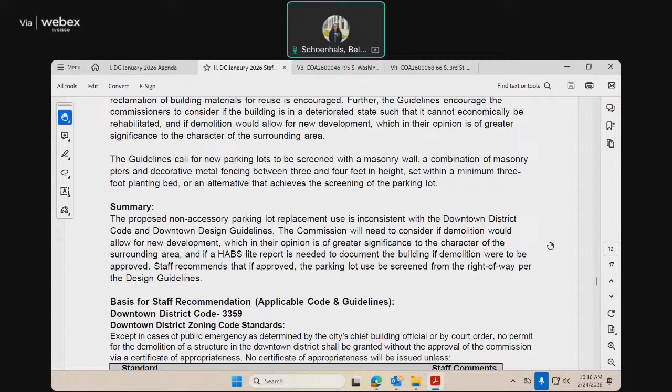The proposed non-accessory parking lot replacement use is inconsistent with the Downtown District Code and Downtown Design Guidelines. The commission will need to consider if the demolition would allow for new development which, in their opinion, is of greater significance to the character of the surrounding area, and if a HABS lite report is needed to document the building if demolition were to be approved. Staff recommends that if approved, the parking lot use be screened from the right-of-way per the design guidelines.

Thank you. All right, could you identify yourselves for the record, please? Yes, my name's Mike Preiser, I'm with the Track Group. I'm the general contractor representing the client, or the tenant for the space. The owner. Yeah, the owner. Beth Reel with Darin Ranker Architects.

Could you raise your right hands? Do you swear and affirm that the testimony you're about to give is the truth, the whole truth, and nothing but the truth? If so, say I do. I do. Okay, thank you very much.

Go ahead. Obviously, in light of the comments from the Downtown Area Commission, we've spoken to the owner, and they would love to still demolish the building but replace it with green space in lieu of a parking lot. The existing structure is in much-needed disrepair. I wasn't able to access interior pictures of the building at the time of submittal. I did print some here, and I'm more than happy to share those with the group. That's okay if you'd like to pass that around.

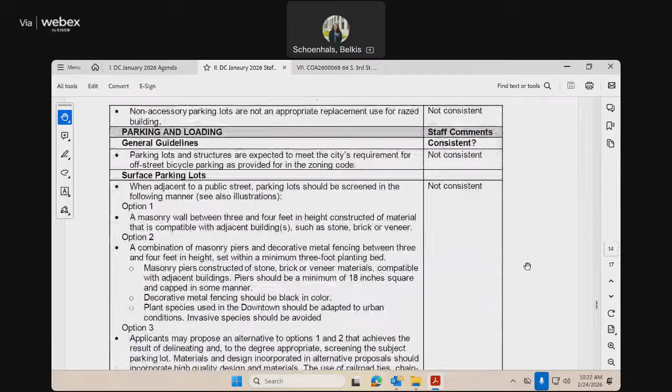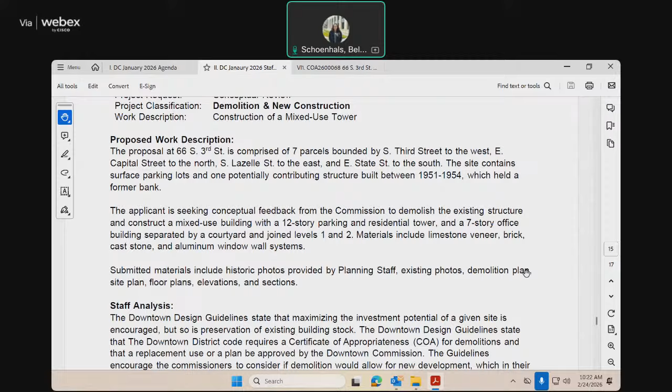So this last application is a conceptual review for 66 South Third Street. This site is comprised of 7 parcels bounded by South Third Street to the west, East Capital Street to the north, South Lazelle Street to the east, and East State Street to the south. The site contains surface parking lots and one potentially contributing structure built between 1951 and 1954, which held a former bank. The applicant is seeking conceptual feedback from the commission to demolish the existing structure and construct a mixed-use building with a 12-story parking and residential tower and a 7-story office building separated by a courtyard and joined at levels 1 and 2. Materials include limestone veneer, brick, cast stone, and aluminum window wall systems. Submitted materials include historic photos provided by planning staff, existing photos, demolition plan, site plan, floor plans, elevations, and sections.

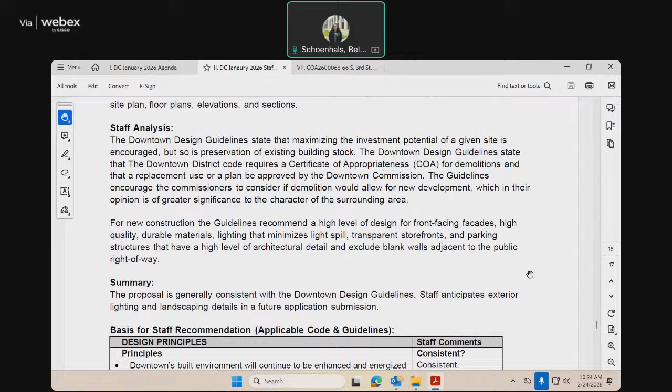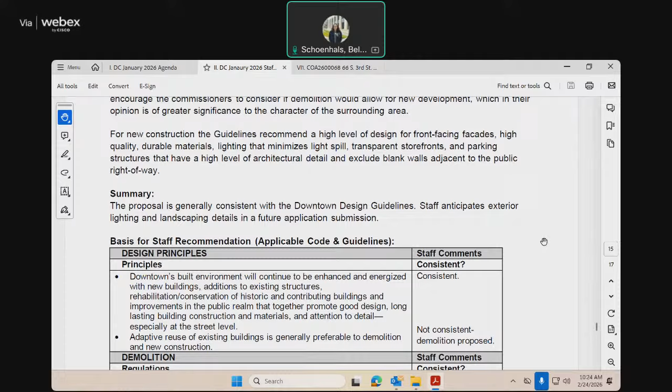The downtown design guidelines state that maximizing the investment potential of a given site is encouraged, but so is preservation of existing building stock. The guidelines state that the downtown district code requires a COA for demolitions and that a replacement use or plan be approved by the downtown commission. The guidelines encourage commissioners to consider if demolition would allow for new development which, in their opinion, is of greater significance to the character of the surrounding area. For new construction, the guidelines recommend a high level of design for front-facing facades, high-quality durable materials, lighting that minimizes light spill, transparent storefronts, and parking structures that have a high level of architectural detail and exclude blank walls adjacent to the public right-of-way. The proposal is generally consistent with the downtown design guidelines, and staff anticipate exterior lighting and landscaping details in a future application submission. Thank you.

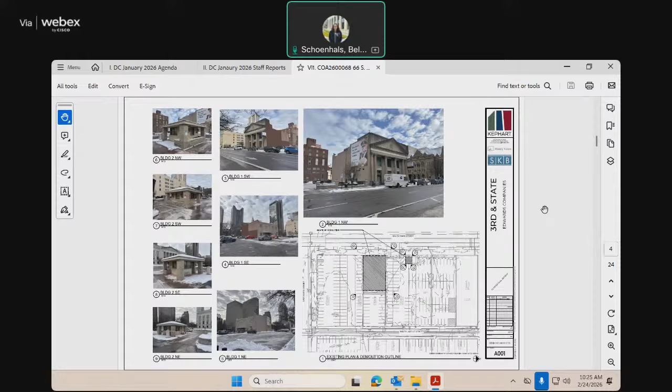So the project is a mixed-use development. We are looking to demolish the existing bank building that occupies the center of the site, as well as the parking kiosk. What we'll be replacing it with is 161 residential units, approximately 360 structured parking stalls, 7 floors of office space on the right-hand side of these plans and elevations, and then the apartment building to the left. Residential floors are from level 5 through 11, with a level 12 amenitized roof.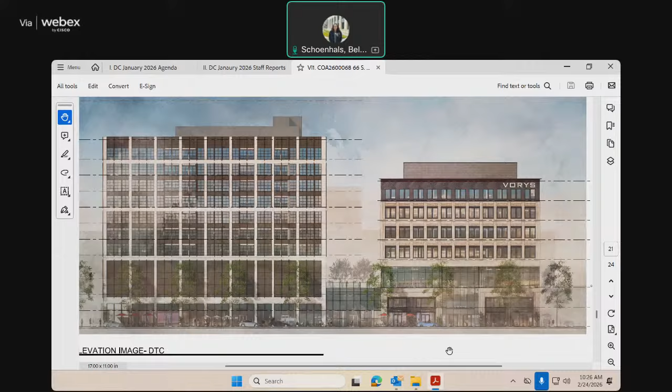Parking structure exists from level 4 down into 2 floors of the basement. There's a green roof at level 3 between the two buildings for the office tenant, and a passive courtyard for the residential portion that's central to the building. Level 12 has exterior amenity to the edge with some green roof plantings anticipated up there, plus fitness amenity, clubhouse - your standard apartment package.

At the ground floor, looking left to right, we have TI improvement spaces, potentially commercial kitchens, restaurant space, and leasing in the center portion where we've got the glass feature separating the buildings for the residential portion. To the right, we have a couple of tenant spaces for the office, and central to that is the main entry into a 2-height leasing or entry lobby as they access up to their office floors and conference rooms.

So the entire building on the right is offices, correct? Correct. And the building on the left is entirely residential? Yes, there's parking structure to level 4 where you see the dark mask mimicking the glazing above - that's parking garage behind, with level 1 having 12-foot finished ceilings to give us our improvement spaces.

You're anticipating retail or tenant space all the way across on the first floor, right? Correct, for both buildings, except for the office entrance. The entirety of Third Street facing is the intent to have active retail space, and it even wraps on State Street halfway down.

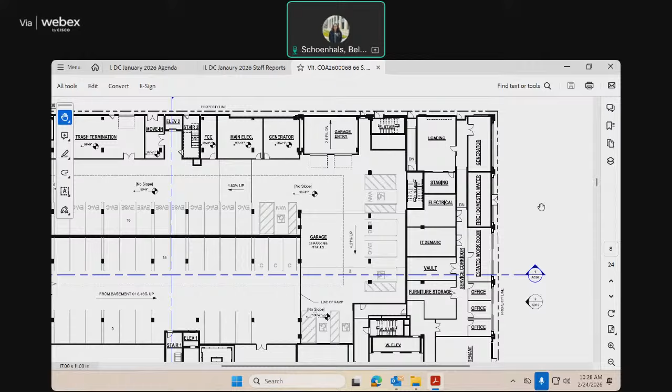All main entries come off of Third Street; back-of-house functions come off Lazelle Street and some of State Street. I had a question about State Street on the first level - I know this is schematic and you're still working things out, but it looks like some utilitarian functions, I think one was fire and one was loading, stairs, electrical, halfway down on the right hand side. As you work this out more, I'm wondering if there's a way to make that State Street frontage as transparent as you can, and maybe add more retail or commercial where possible, to maximize the frontage on State Street since it's such a prominent street.

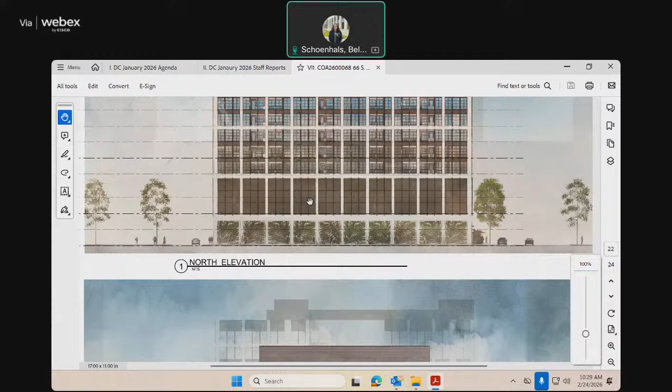Is there an elevation of State Street? Let's see, it's on A019. Yeah, that's the State Street south elevation. So while you're talking about the frontage and activation of the streetscape, is that right?

Yeah, when you look at this, the bay all the way to the right is mechanical with louvers - I think that's the generator. But other than that, from this rendering those look like they could be usable commercial or retail, though in the floor plan they don't look like it. Yeah, they're not - the commercial retail portion wraps back like the first two bays, and then the next three are utility spaces, but designed to look like they're still retail from the outside.

Okay, so maybe just study that and see what that's going to look like. Is that dark glass or something there? We don't know typically yet. We don't use dark glass at the street level, it's always clear. But probably if it needs to be clear, you've got to figure out what's the inside look there.

I would say the fourth bay, if you had two of those that were that kind of thing, I think that's basically blank spaces, opposed to what we're going to be showing here, which is two bays that are more of a utilitarian area. The fourth bay looks like a room, it doesn't say what it is. So from right to left, those first two window bays are where back of house utility space is planned, then it moves into workrooms, offices, and in the middle two, then retail space.

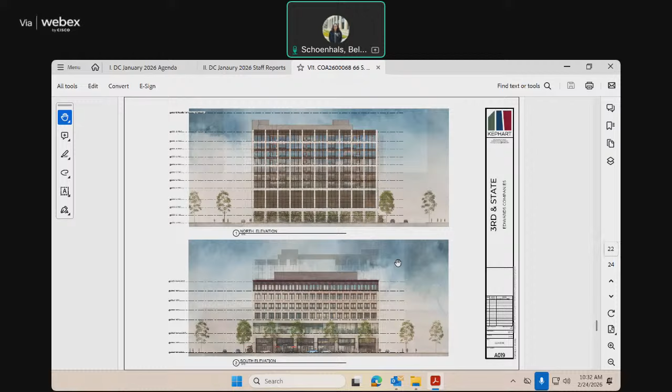Show us that west elevation again, Belkis, could you? Oh sure. By the way, everybody remember, this is a conceptual hearing, so what we're doing is just chatting about this and getting impressions, this kind of thing.

So that glass band there on the third floor goes around on the west side. Again, I think that's great. And I also like that glass entry there of about three floors, where you go in. I think that's handsome, and that would be basically the lobby for the office building, right? So to the extent there's retail, it's either side of that entry. Yes.

And so the building on the right, guys, is maybe more traditional in nature in terms of stone coursing and corbelling or whatever we're looking at. And the building on the left is more of a sort of loft warehouse concrete kind of structure.

Tell us what you're thinking about on the elevations, on materials. On the left, it's a modern industrial take on it with cast stone grid, really utilizing the window mullion system to create this grid pattern with depth and texture as we go off the cast stone and into the window system. So there will be layers of material on the curtain wall system to add depth to that facade.

I was gonna ask, do you think that building is flat? The background pattern is more flat, but then as we get into the window system, that's where your texture is going to come through with projections off the system.

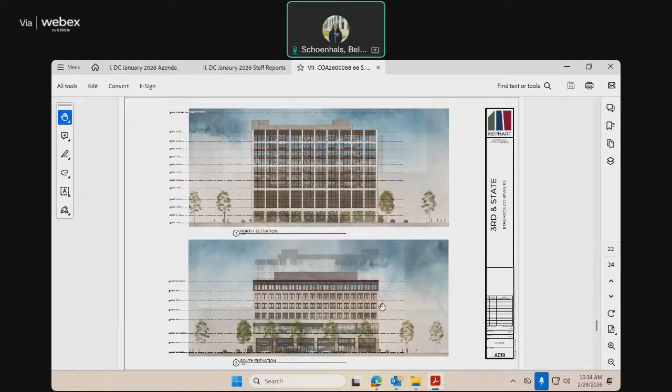Now, how would that work, projection or depth? The additions of mullion depth beyond the standard two to four inch depths, we'd be going to six inches or eight inches outward from the face of the building in order to add that.

What would the horizontal bands be in there, the dark ones in between the white? That's a metal panel spandrel infill at our floor lines within the curtain wall.

Another thing you're not really reading when you look at this elevation is there are balconies - you can kind of see where the railings are. There are bays where they'd do a window system, set back in, with some access to the outside. They're approximately 5 feet deep from the face of the building back in.

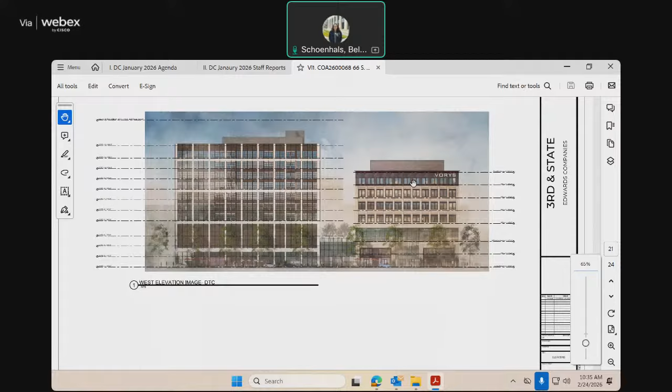And the parking garage screening, what are you thinking that would be? We're looking at a similar spandrel panel with a cross-hatched metal wire infill to add some texture to the system, so it's not just a flat plane, and that would tie into what we're doing at the fitness and amenity level. So it's solid, not open? No, it'd be like a wire mesh, but a really tight mesh, probably 20-30% visible through.

Does that get lit, or does it just go black at night? Well, I guess the garage would be lit inside behind it, so you'd see through it a little bit at night - much more than in the daytime.

Did you say that for the parking screening some of that is spandrel? No, there wouldn't be spandrel glass on it - it would be like a mesh panel.

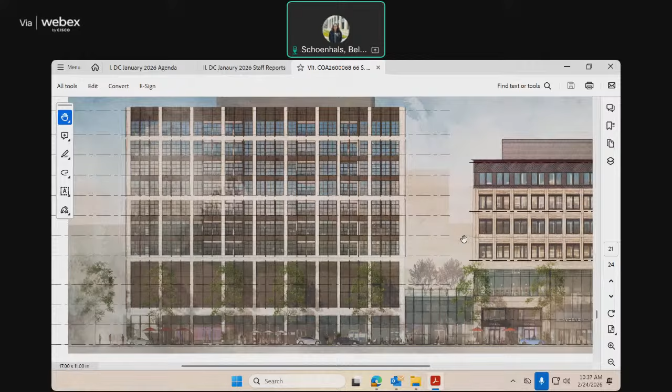I think whatever you do there, it can be very simple, but because it's a very prominent facade looking out to Capitol Square, I think it should really be unique. Maybe a little more articulation, similar to the bays of windows above, thinking of it more as a standalone architectural piece - not just some wire meshing while the rest of the building is more articulated. It can be very simple and elegant, but a design element in itself so it looks deliberate and contributing to the facade. I love industrial buildings, but you want to be careful about how much of an industrial building you're transposing into that location - something to work through in the thought process.

Tell us about the little building in the middle, the two-story thing with the glass in front. Is that on the street frontage, or pushed back? Pushed back a few feet - that's really the entry to it. Is that the specific entry to our leasing center? Yes. On the right-hand side, there's the column established by the corner of that building.

That is approximately a foot back from the property line, and then from there we step the glass module back an additional 2 feet, so we've got a 3-foot relief from the property line in that area. Then as we move left to the apartment structure, we come back out to the property line, more of a zero property line condition, so you get some articulation.

Wait, as you come back to what now? On the left-hand side we're right against our property line, pretty much zero setback. Then at the glass 2-story building we're 3 feet back. And the column to the right comes forward 2 feet in front of that glass building, which is set back a foot maybe from the front property line. There are recesses in that, and the idea is to add a little broader sidewalk in front.

Is that system just a hyphen between the two towers to separate them? But why is the building not coming out to the sidewalk, to the property line? So it comes within a foot of the property line - that was the design decision, to allow the building to return back and establish a prominent corner on that to the glass building.

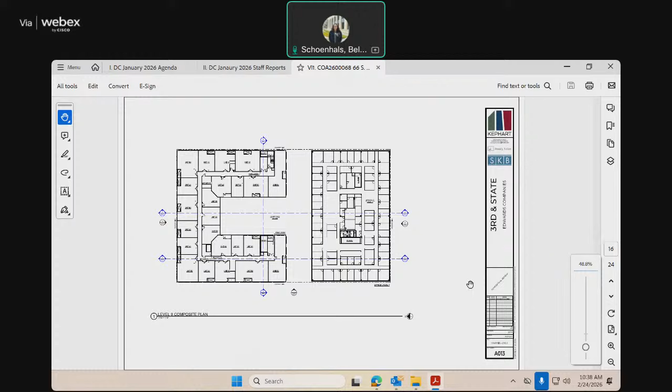As far as why it isn't coming out directly to the property line, I'd have to look to the design team that's really influencing that particular building. But it's within inches. Does the 2 to 3 story building in the middle go all the way through the property? It does, it goes all the way back to Lazelle. I see trees on the roof.

Is the idea that that's an amenity plaza for Vorys? It's really dedicated to their office building and they plan to use it. That glass floor in their building is intended to spill outside for events. So that glass could just turn the corner, and they've got their conference and meeting rooms on the 3rd floor, anticipating everybody spilling out there for events. Now, it's going to be a shaded thing, so it'll be hard to grow plants there.

Is that Vorys courtyard and the one for the building connected in any way? Are they on the same level? They're not at the same level. One is at 5, one is at 3. There's no plan to have those two interconnect.

What is your facade on Vorys there? It looks like stone, is that cast stone of some sort? The lower part of the building is either cast stone or real stone, so we're looking at both. That blondish color, we've been looking at the State House stone and going back and forth on how close we're going to be to that. We really wanted to use that stone but we obviously can't get it.

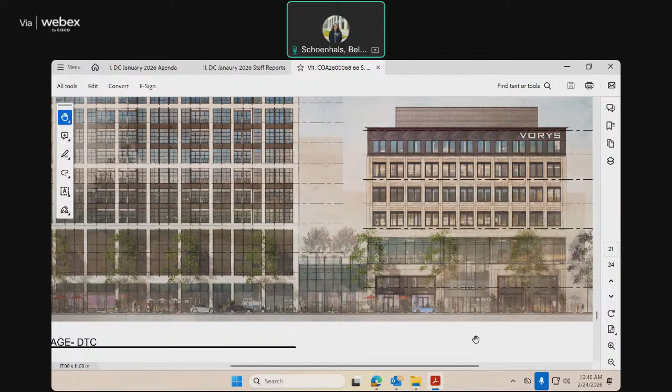So above that is brick. It'll be a light colored brick, complementary. You can see there's a lot of corbelling above the windows, so it'll have a lot of depth. Then there's kind of a metal header above that window and a metal infill, and the top floor is a metal panel with a scallop we're looking at right now. We're also studying whether it could be bronze or some other material, but it's in flux, though it'll definitely be metal. Again, these folks are here for conceptual review.

Any thoughts, it looks like a fantastic project to me. My only comment would be to be careful on the industrial warehouse building aesthetic, that it doesn't seem out of context. If this were an industrial area it would fit in, but on Capitol Square I'm not so sure.

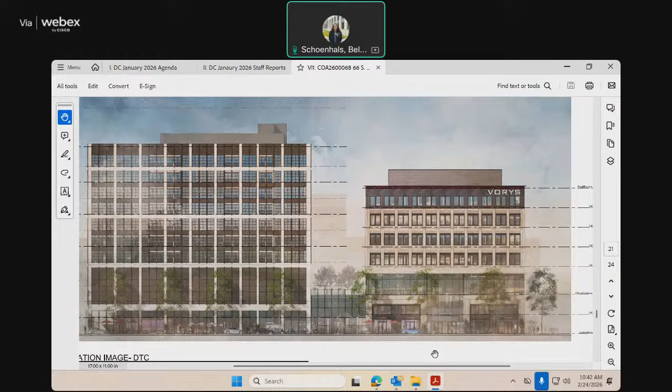Also, right now industrial-looking things are popular or fashionable, but because this is the courthouse square, you think, in 40 or 50 years will that still be fashionable? So maybe try to think about what aspects of the design will continue to be classic, not trendy, but have longevity in terms of good design. Sometimes it's hard to do when you're living through an era.

I just had a quick question about the original bank building facade, if you could talk about that. I know it was built in the 40s or 50s and it's just a facade, behind it is just a very plain building. Before you started working on the project, had you ever thought of incorporating part of the facade into the design, or had HRC commented on it, if it holds any significance, maybe not architecturally exactly?

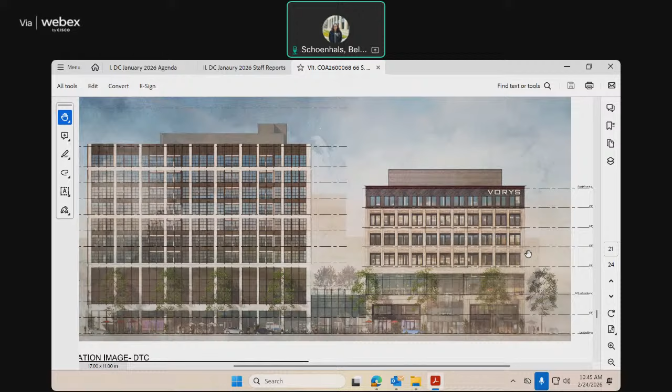I would encourage you to look at that. When I looked at this and heard you describe the planes of the three different buildings, but then I looked at the plan, and it's really flat.

I'd really encourage you to push the leasing center back, maybe six or ten feet, enough to make a difference and have a little elegant green space. There's an opportunity there, give it more articulation, and frankly if you had something green growing it's a place to put a little accent in between those buildings. So that's kind of an easy one to me, you'd give up a few square feet, but not that much.

The leasing center. Okay, do you guys have any questions for us? What's your schedule?

As fast as possible. We're looking to be back here for the April meeting for our final presentation, proceeding through a fast track foundation set and then a few work sets to get to our ultimate design.